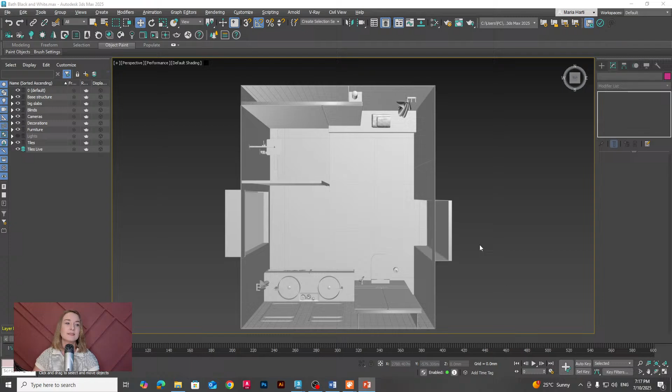We'll have a bathroom with a window, which means we'll have natural light coming from outside, and a second situation. This is actually the scene you've seen in all the videos where we invited you to this masterclass. Here you can see it just in gray color - it's just the model of it.

Each of the scenes I usually recommend organizing really clearly on layers so you can easily get access to each part of the scene you need, simplifying and adding everything you need in this scene.

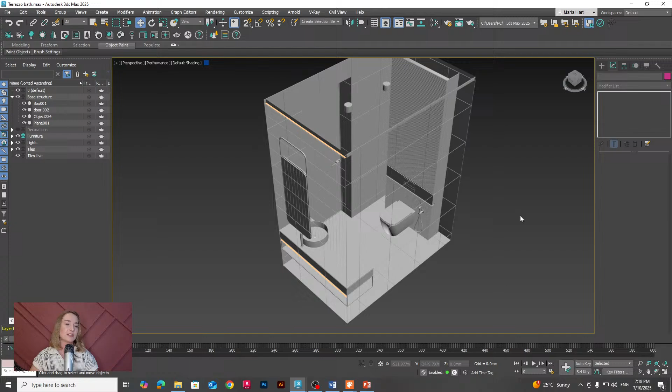The second situation is a half bath, actually a bathroom without a window, without natural lighting, where we'll pay more attention to artificial lighting. So we have here just the toilet part and the sink. You'll also notice I've used almost similar models, but in 2 different styles.

The first one with the natural lighting will be in black and white colors, the one you've seen during our invitations and at the beginning of this live. The second one will be, in contrast, a little more colorful - I'll let it be a bit of a surprise for you until the end, so you can see the result of this one too. So we have both these scenes that we'll explore for today.

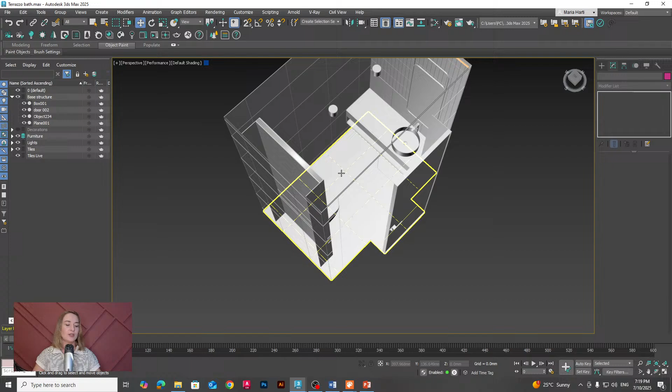And we'll start, of course, with tiling - it's the first part, this is a part of the modeling actually. Because I already have the tiles placed in here, I will just hide my layer with the tiles so that I can get back just the walls to use for this scene. And I'll do the same in the second. So that's how it looks right now.

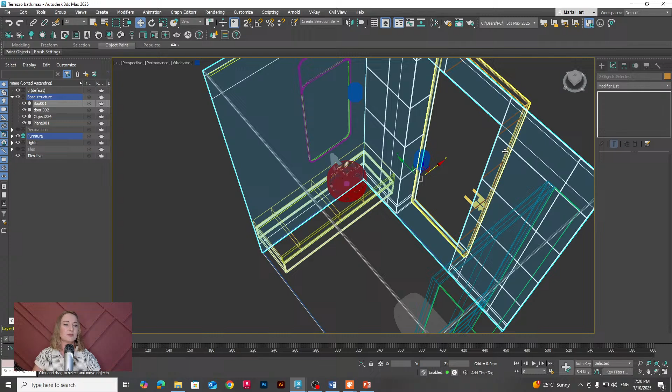Okay, and we'll start with this one. I need to move some of these tiles onto the hidden layer so I can do it from scratch, so I can show you all the process step by step.

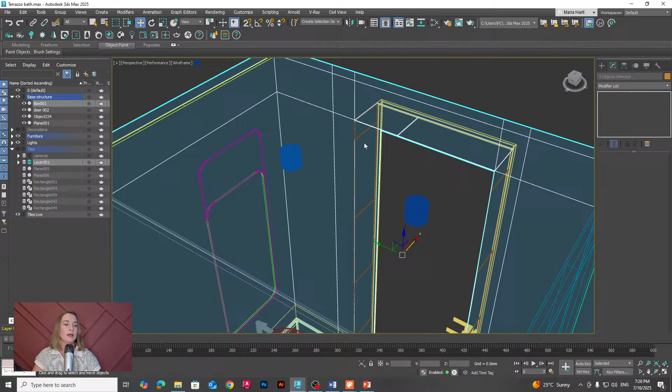I will keep just my base structure, just my walls, so that I can easily go through this scene and place the tiling that I need. Let me turn off all the others and keep just my base structure. Here it is. You'll notice I have backface culling applied, which means I can see through my walls and easily explore what I have inside this room. It's a really small room, since it's a half bathroom.

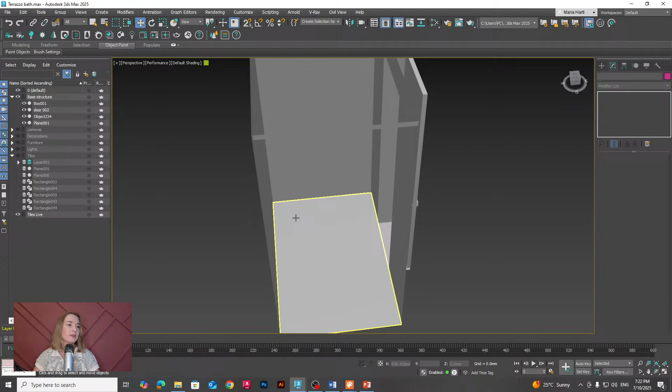What I'll use now for tiles is the plug-in floor generator. I'm pretty sure you've heard about it. If you didn't, it's important to start using it, because it's an indispensable tool that helps a lot in generating different tile patterns and will help you quickly create all the necessary tiles in your scene. But not just tiles—it can actually be used for other interesting stuff too.

The first thing I want to show you is how we can easily adjust the same type of tiles on 2 or 3 of the walls, so that they can be connected between them, always aligned with their grouts, and easily controlled in time.

I will start with a left view where I can see the door. For using floor generator I prefer using shapes—it can also be done with planes, but it's important to have just 2D objects, not 3D, because the floor generator will crash instantly. So better to go with shapes or planes.

I will start with a rectangle, using snap toggle in 2.5 to make sure that if working with line you have all planar, or if working with shapes it will be much easier. I'll go and place a rectangle. Because on this wall I will have the door opening, I will uncheck start new shape and add to the existing rectangle another one that will actually add my door opening.

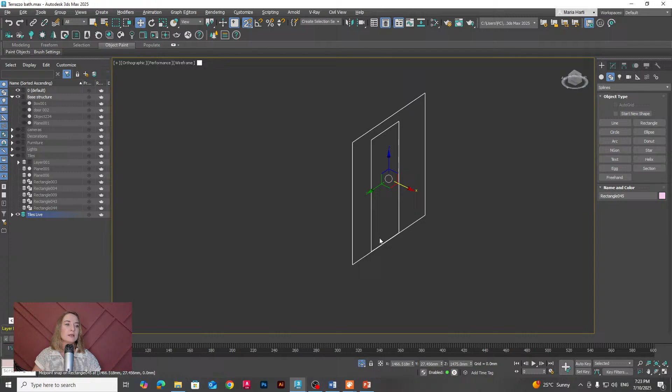Let me show you what I've got here—it's this spline. I will isolate it just to show you the next process.

Going to modify, I will move slightly outside these 2 vertices. An easy way to get just the needed outline for the wall where the tile will be placed is to use Boolean operations right inside the editable spline. Select your main spline, the outline of the wall, select Boolean, press Boolean, and click on the second shape. This way you get the second shape subtracted from the first one, giving a quick outline of the wall without the door opening. You can also go with line and outline each corner point you need, but for me this is a quicker way and you'll get a quicker result.

Let me show you what I've got now. So I have this outline of the wall, and I will apply the floor generator modifier that will help me quickly adjust and give the needed size for the tiles.

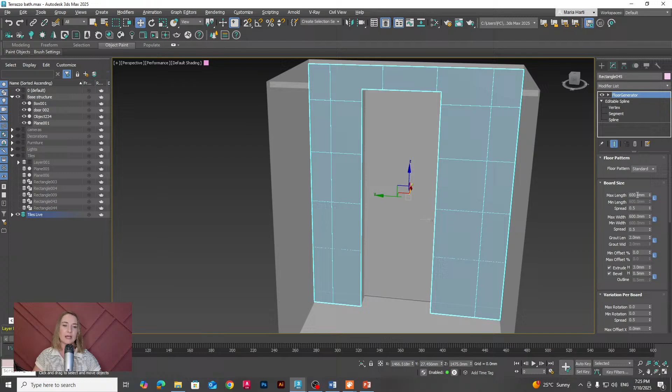In my case I have tiles 600 on 600. 3ds Max already remembered my previous settings, so it will be quicker to pass through them without taking too long. Grout length is actually the distance between tiles—if you've used it before, I'm sure you know how to set this up. Make sure you give the needed extrude amount and of course the beveling to get nice chamfered edges, so that the volume, the model, will look nicer and bring a fine touch to the model.

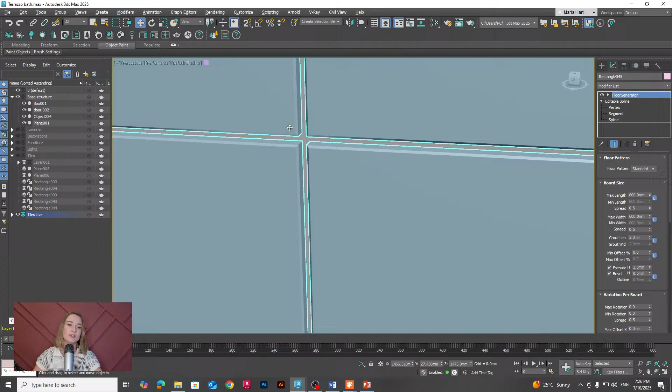I will repeat the process for the next part, the opposite wall. This time I will use not left but right view. Let me go on right, and here I will continue with another rectangle, again making sure it is placed and aligned with the wall.

Here it is. Let me show you a really quick and nice trick: you can easily select the tiles you already set up, go to modify, right click on floor generator, and copy the floor generator with all its settings already applied. Then I'll go back to my new shape.

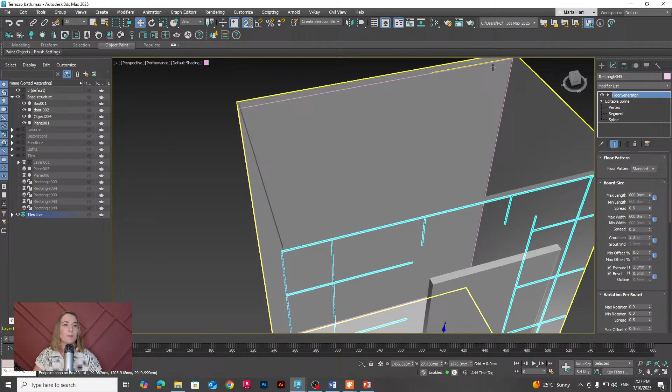Okay, let's make sure we have it in place. Now just right click on it and paste instance. Why paste instance? Because this way you'll keep the connection between the settings of this floor generator, and when you want to make some changes, for example to move or rearrange the grouts of these tiles, let me show you a quick example.

You can see that they will always be aligned perfectly, especially visible if I add the third wall. I will go with the back view.

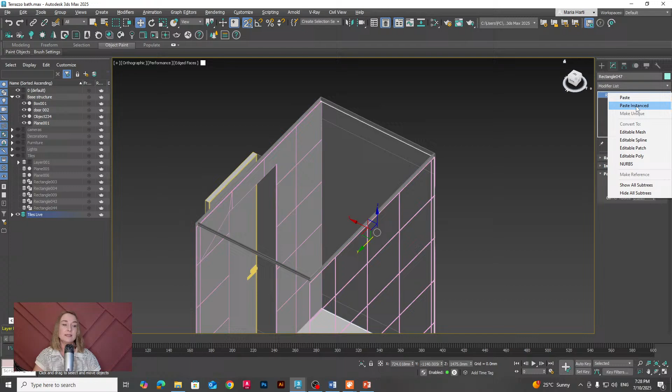In the same way I will add another rectangle which should be placed right on the wall. Right click and paste instance, the same floor generator with all its settings. Look here, you got this perfect alignment.

Again, if I try to use offset on Y or on X for rearranging the position of these tiles, you will quickly notice how easily you can control all of them at once. Just let me know if you have used this trick and if you find it useful. I'm really curious what you think about this.

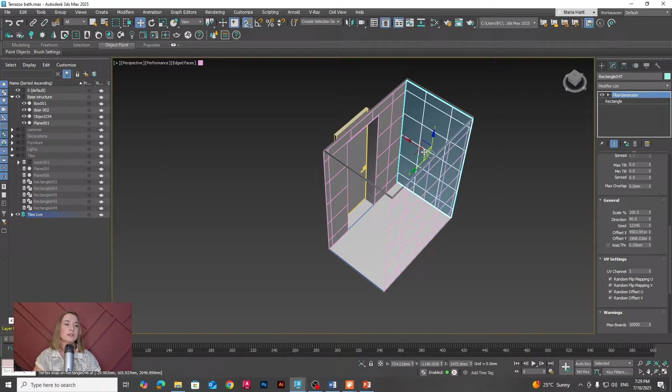Of course, when you need to disconnect any of the tiles, maybe from the wall with the floor, you can use the same trick. For example, I have this wall with floor in another material, so to disconnect this tile from the other two, I will just use the Make Unique button here.

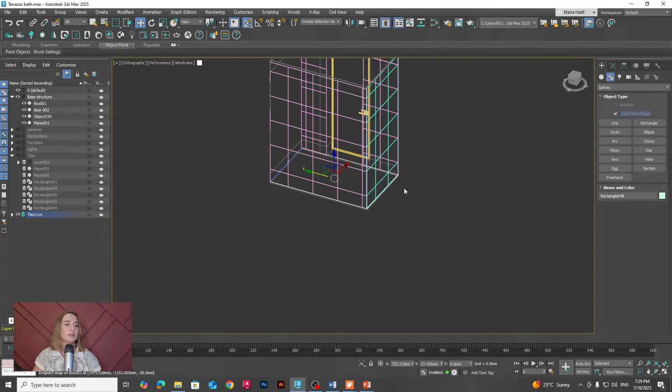Then I will copy the floor generator from this one, and I will go with another rectangle from top view to generate the tiles on the floor. Let me show you this one too.

In this case I could use the line tool instead of rectangle, because these tiles should go until the door. So let me go back quickly and readjust it.

It's absolutely important to use the 2.5 snapping tool, otherwise you can get some vertices placed at different heights, which you don't want when working with a floor generator. Make sure you have them all aligned at the same height.

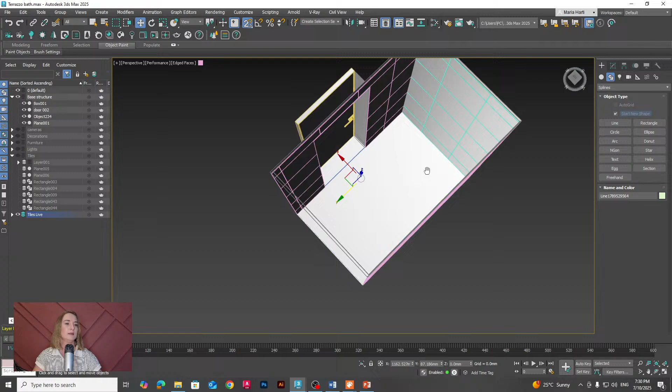So this time I will go and again right click, paste instance. You can repeat this anytime you want with all other surfaces where you use the same tiling. It'll be quick, fast, and with big impact, because you'll get them perfectly aligned in seconds, just copying and pasting the same dimensions and of course the same other settings, alignments, offsets, and so on.

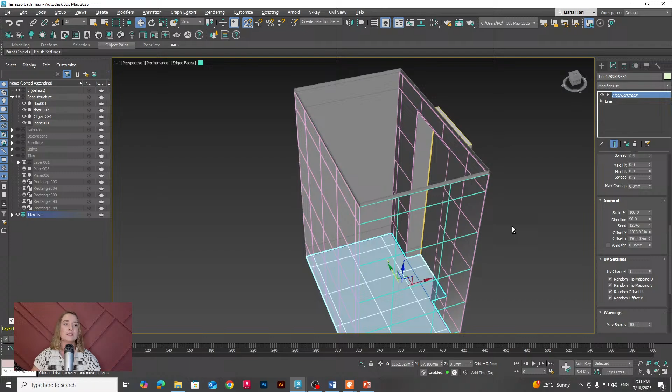You also know that you can change the direction of tiles in case you need that, and I'll show you. I'll turn back on all my other tiles that I already have prepared for this scene. You will see here the same situation.

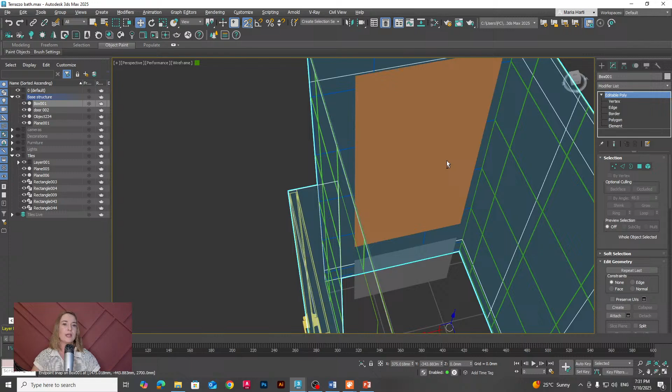Behind the mirror, where the sink is placed, I have a more detailed tile that is smaller in dimension, 250 millimeters in length and 61 in width. What we can easily control here is its direction, so we can get a horizontal layout, a vertical layout, and you can quickly create a running effect if you need that, just using the offset amount right here.

In case you need something like this - it's not in my case, but you can use it anytime in your project. So these are the most important parts I wanted to talk about in the modeling process.

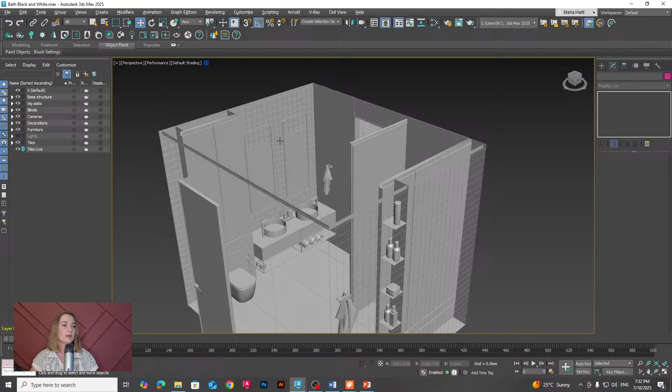It's the same for the second scene, where I can quickly show you the parameters I have. I have squared tiles here, 100 by 100 millimeters, so I have grouts - empty spaces - and in the materials step, you just apply the color of the grouts directly on the wall behind, and it will give the needed effect for the grouts between the tiles. It's simple, and you can quickly adjust it.

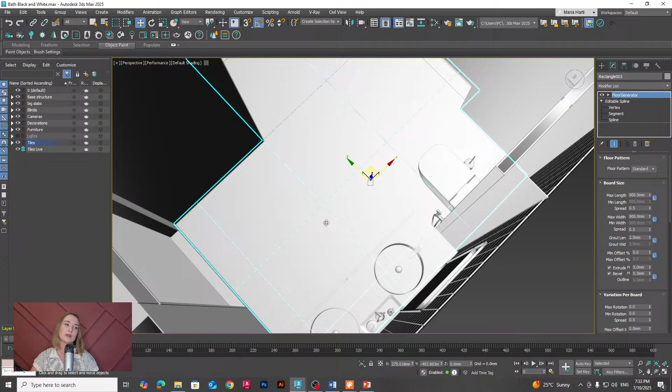Also I have some bigger tiles on the floor, 900 by 900, and really big slabs on the walls, entire height, with just a few grouts visible in a few places. Let me turn off edged faces so you can clearly see that. Okay, so that's what I have here for tiles.

Now we'll move on to setting up the light, because it's the second important part when working with visualization, actually in any situation, bathroom included.

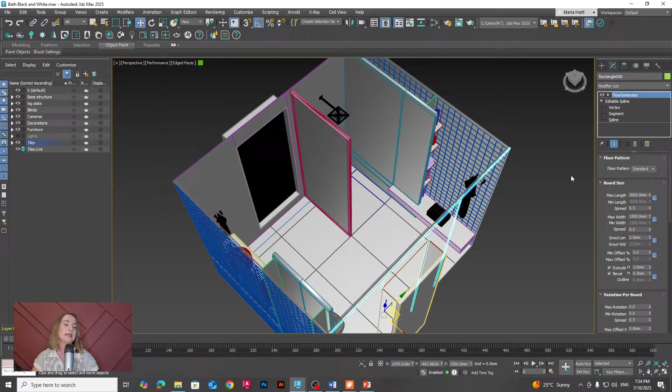In this case, we'll explore two situations. The first one is with natural light, because we have a window where we'll get environmental light from outside. The second one will be just with artificial light. We'll explore both situations because, although having a big window makes many problems easier to solve, each situation can actually be solved.

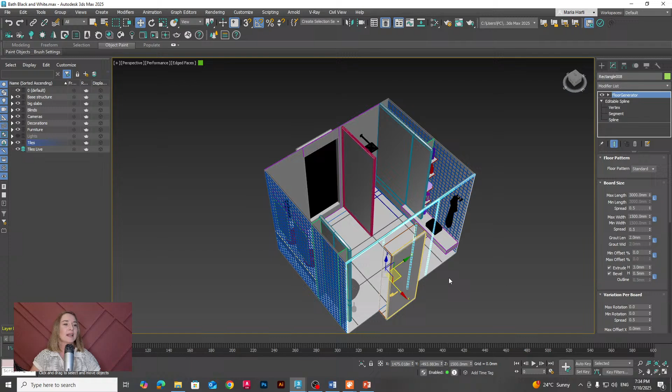Let's explore the first one, where we have natural light. For this case, I am using just a Corona Sky for environment. You can add the Corona Sun as well in specific situations if you want special effect lights, shadows from the sun and so on. It can be applied, but in my case I have just environmental light made with Corona Sky.

So for that, let me open the Material Editor. Just find Corona Sky in the maps rollout, you can find it right here.

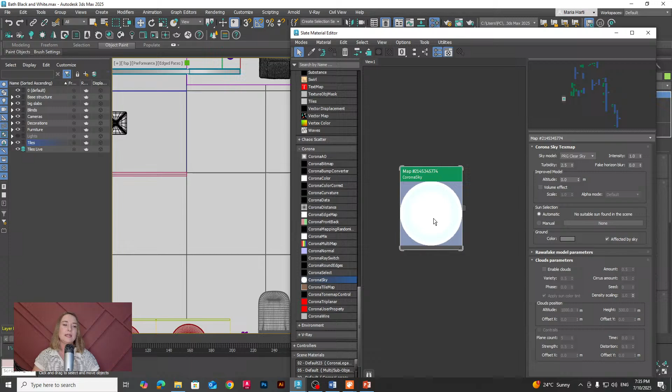Because I have a window with blinds, it won't be so important to have any specific environment view from inside. So I will limit this scene just to the skylight, but to make sure I won't get a clear line at the horizon, I prefer to blur it a little bit. I set the fake horizon blur up to 0.3.

Without sun, the sky will give a really cool, very blue light from outside. So I prefer desaturating it, using a Corona color correction and giving the maximum -1 to desaturate, to get rid of the blue color from the sky.

With this prepared Corona Sky, I will go to Render Setup, to the Scene tab, and in Environment I'll delete what I had before. I've used this before, but let me show you these steps again: just drag this node from here and place it as instance. It's important to be instance, so any changes made here will be applied here too. Go with OK.

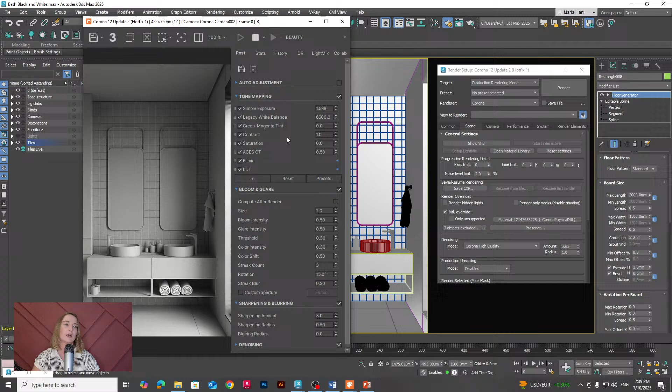You can see how the shadows and the lights play for this specific frame. Additionally, sometimes if we overexpose it or don't have enough light, we can use additional tone mapping elements to get the right effect. For example, highlight compression when you have overbright surfaces, or other things like this. I will open some of my final files at the end, so I can show you all the tone mapping elements I've used in my scene, so you can extract some information from that too, because 1.5 to 2 hours isn't enough to discuss each detail like this.

We can also go to another view, let's take a look here. You can see how the light comes in. I've excluded the glass and window glass, and the glass from the shower, from my override materials, so I can see how the light passes through and creates this natural light in my space.

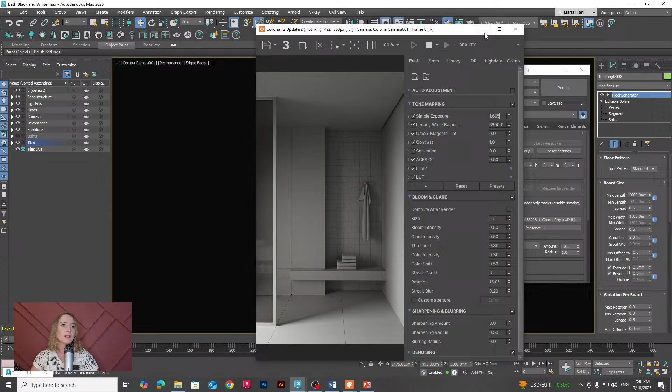Because I have prepared some artificial lights, let me show you which lights I've used here. I have two lights behind this wall with the toilet, and I have mirror lights that are actually created just with Corona lights, so we'll be able to see them later.

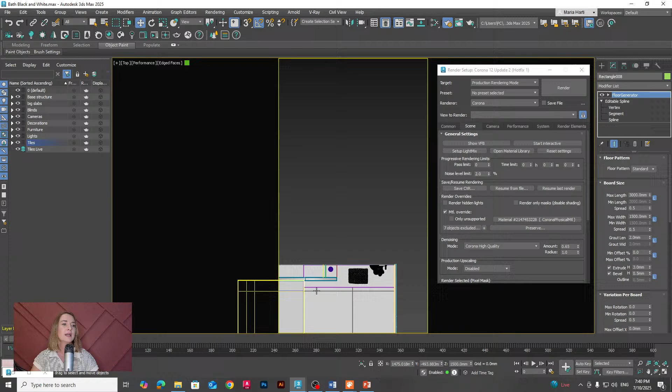And I have a decorative light here for some shelves behind the shower wall, this interesting element that will come with an interesting effect of lighting behind these shelves, and two more Corona lights in rectangle shapes in the ceiling, on this side and this side too. I've turned them on, and let me show you quickly what we can see in interactive rendering when we have these lights here.

What I have to mention here, and this is really important, is you always need to follow the right hierarchy in how you set up the lighting. If you have natural lighting, always start with natural lighting, then go with artificial main or general lighting, then go with local lighting, and at the end the decorative or more specific detailed lighting. This way you'll make sure you've set up the first one well, then the second is adjusted to the first, the third to the second, and so on. This way you'll get a balance between how each of these lights will work. If you place them all at once and try to figure out which works and which doesn't, it will be more difficult.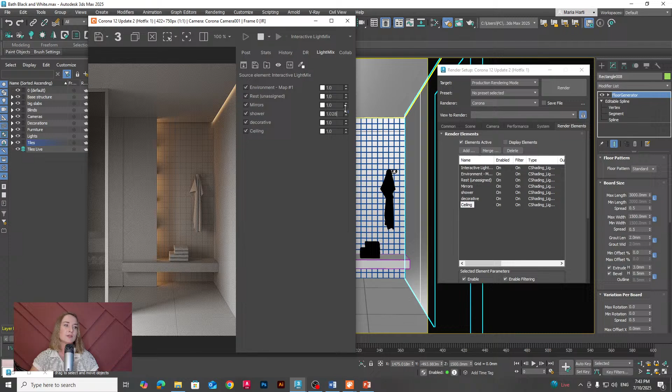I also recommend, as I've talked about in other masterclasses, Light Mix as another powerful tool that can be set up from Scene, Light Mix. It will appear here in the render elements. It can be controlled and readjusted also from here, so that in real time we can easily control and adjust each of these lights to make sure we get the needed result.

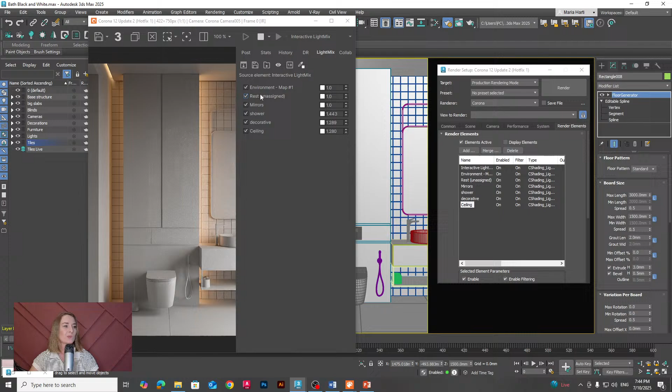In this case, you'll also notice that I've used warm color for the light, so that I want it in contrast with this cold interior where we have just black and white, to bring that touch of warmth in contrast, so that we've got this nice accent using these lights. Let me show you from another point too. Okay, that's another side. One more side here. The same warm light—you can feel the contrast. Especially when we get all the models with their reflection level and their materials, it will bring those warm touches that add a lot of realism and interesting effects for an interior. Okay, that's how it looks for this scene.

Now let's move to the second one, where we have the bathroom without a window, and let me turn on everything I have in this scene. Okay, everything I think, beside the lights. I will turn off all the decorative lighting, and let's see how we can solve the same situation but using the artificial lighting as the main lighting.

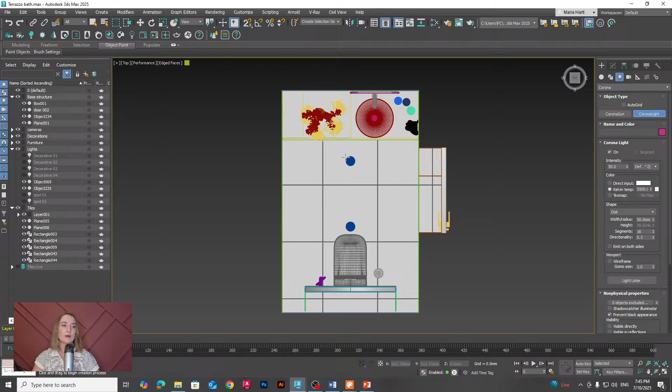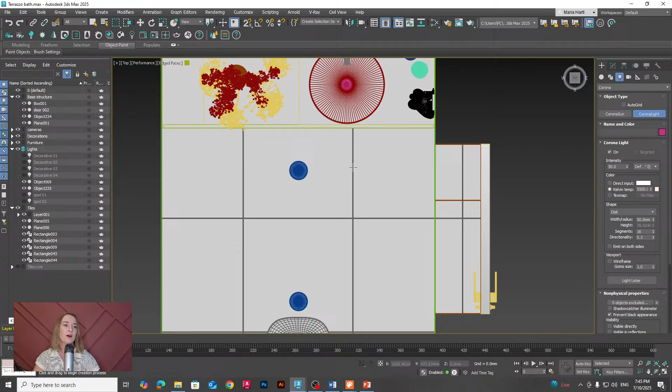I have two spots right on the ceiling, so I will fix two Corona lights. Since they are round shaped, I will use disc and just place it. I have a hidden layer, so I'll just have to activate the lighting layer so I can place them in the right place. Okay, here it is. Of course, I'll need to bring it up to my spot. It won't be directly visible, so I'll place it just next to the spot, making sure it's not inside or too high, so that the light will show up.

Next, I will create an instance copy. Always use instance copies for objects that should have the same properties—it eases up the process, so you won't need to change each of them separately each time. So let me go to one of the cameras.

Yep, here it is, and of course I will do the same thing. Let me open and make sure I have material override activated here—yes, because I want just the gray material. I recommend doing this material override because it makes it easier to understand how the light affects your interior, and how the shadows and everything works, without distracting you with different colors or materials that aren't already adjusted for your scene. So let's go with interactive rendering here as well.

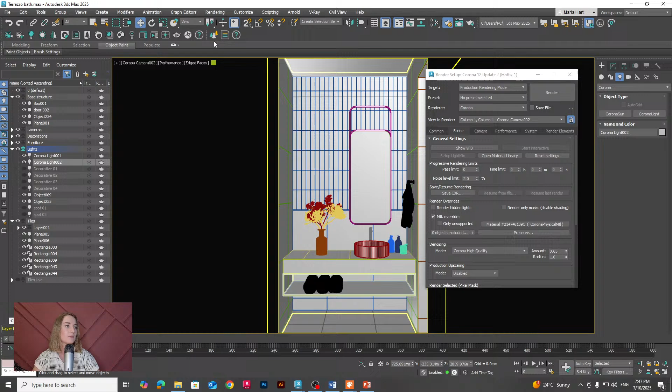Okay, I have it in here. It's not too bright. Of course, we can adjust either the intensity of this light or the overall exposure. But before doing that, I recommend instead of using just a simple corona light in this shape, even if I gave some directionality in here.

Do you know what directionality does? At 0, it lights all 180 degrees, but increasing this value, the angle of the light will narrow, so you'll get a more conic effect.

But instead of doing that, to get a more interesting light effect with more interesting shadows and reflections, I will use an IES file that I will load quickly right here, just pressing on the None button. So I have a quick set of IES that can be accessed. You'll have them in the end files of this set too, so you can experiment with them as well. So let me choose one of them.

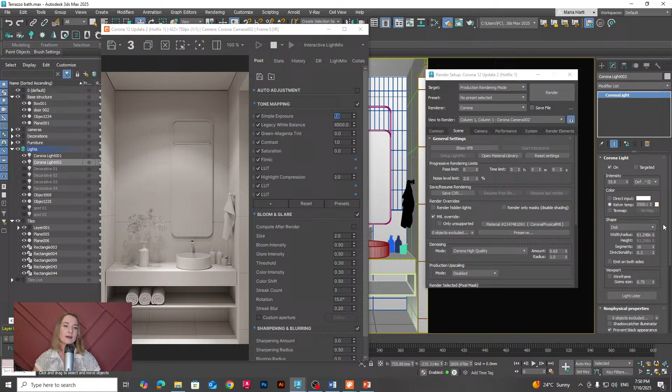Okay, so let me also show you what other lights I have in this scene. I have some additional decorative lighting, the same here for all behind the toilet, and I have a mirror. The mirror will be visible in the next step because it's using Corona Light material and it's overridden now. And I have 2 more decorative lights.

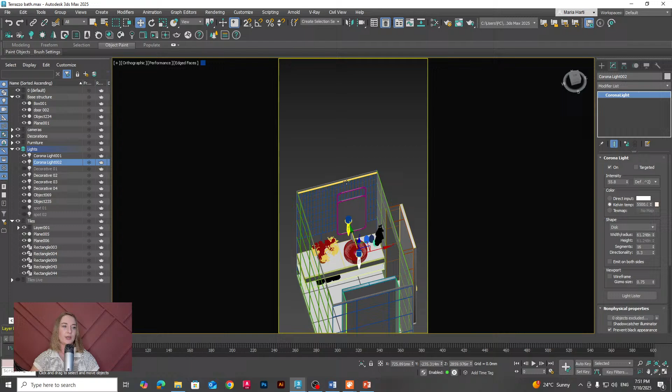Okay, let me turn them on. So these 2 are, yeah, this one up here that will lighten my tiles in here. The other one is right on the bottom of this countertop, and of course I have those 2 behind this wall.

Let me show you what we have as a result with this light turned on. Turning on the interactive lighting. I have them turned off here too, just making sure.

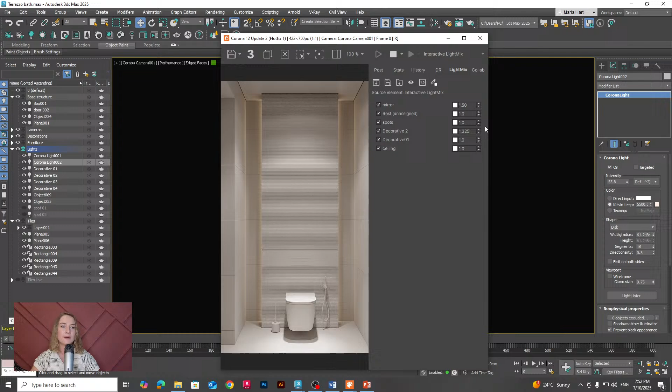Let me see which one controls which. So I prefer giving them specific names so that I can easily navigate through them and see which one gives what effect.

So here is this side of the bathroom, and we have the other one right here. So this lighting in here and this light on the ceiling that also gives some interesting effects for this tiling right here.

You can feel this game of shadows and lights, and you can feel how they work together, and that decorative light just gives an additional touch, and they are not the main light that brings light into this scene.

So spots will remain the most important parts of this scene. Let me turn them off or on, and either way we can see clearly what we have in this scene. That's one of the most important things. Okay, let's bring them back.

And now let's move to some of the materials that I want to create with you for this scene. So we'll run through a few of them. Of course, we don't have enough time to texture and create materials for the entire scene, but as I've mentioned, at the end of this masterclass, you'll get the entire scene with all the material libraries from these scenes, and with render presets all ready to be used, so you can repeat the process and learn more from this entire masterclass.

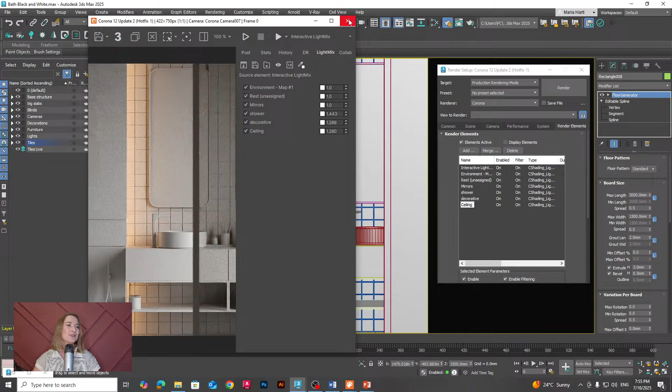Okay, until I get your responses, I will just go to the next step. So the next thing I will do will be actually the material for these tiles right here. Maybe we'll go with this one here, the squared one.

Let me just make sure I get a closer view so that we'll be able to explore more with these tiles. Maybe I'll show you a quick preview for these tiles - I'm pretty sure you've seen them. It's these shiny white tiles with really nice reflections. It will be the most simple from all others because it will be a plain color, but the roughness or the reflection is what makes it look better and so nice. So let me show you how to do that.

Because I have it overridden in materials, I will make sure I exclude this from overriding so that all the next steps will be easy to watch in interactive mode and control all the settings. Okay, let's open material editor. For this tile, I'll use Corona Legacy MTL. Let me quickly find it. By the way, you can anytime rename material for easier control and to find any of the needed materials. I will apply it right away to make sure I can run the interactive rendering and watch in real time how it will affect the tiles.

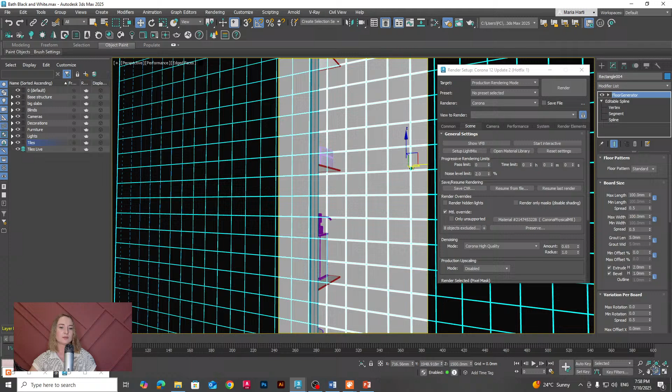Okay, so we'll need to turn on the reflection. Let me make sure I have it applied. Just a quick check. Let me open it back. One more thing here, we'll be reducing the glossiness to 0.85, something like this, so we can get instantly the preview here. And for a better shiny effect, I'll use a Fresnel IOR of 2. Increasing it will increase the amount of reflection, bringing a more glossy effect, but not perfectly reflective - it will be with slightly reduced glossiness.

Okay, let's go to preview. Let me make sure I'm inside the room because I've just used perspective view, and this can bring us to... okay, let's take a closer view. It's a bit too high, the luminosity in here. Let me show you this way. Yeah, you can see now here this effect.

Of course, the grouts will be black. Now they are with the test material, gray one. Actually, we can exclude the walls too from overriding. Let me quickly select them and do it right away.

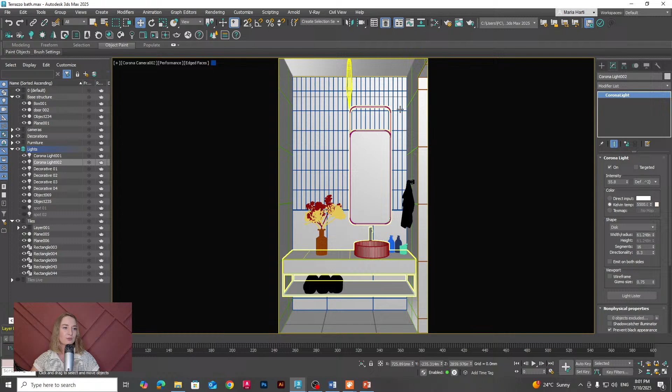Let me show you again - so just Fresnel IOR, just the color, and just the glossiness slightly reduced. So that's the most simple tile I've used in both of these scenes, but I will show you a bit more complicated version of this tile, this time in the second scene right here. Also, maybe I will go a little bit closer to this wall, because I have a similar wall here, but the shape is a little bit different for the tiles, and here will appear a nice color instead of the first one.

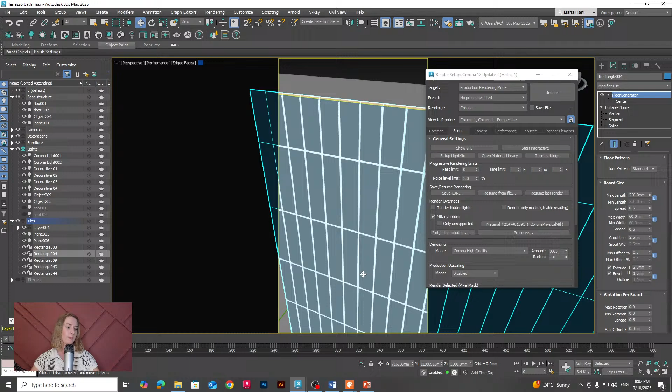Okay, let me go and exclude them from overriding material. Let me quickly check here the settings. Almost there. So going back to material editor, creating a new material for that too.

We can go actually with both Corona Physical or Corona Legacy. I like controlling the roughness, or let's say the glossiness, more in Legacy, but it's more because I'm used to it - both of them work as well. So let me go and do some changes here. Instead of using a simple plain color, in this situation I will use a variation of the same color. For that, I will use a multi-texture, which is also an external plugin that can be installed and used whenever you want. It is really nice and easy to apply.

So let me quickly find it. It's right in the general maps, multi-texture. It works well with floor generator, so if you use them always you can combine them together, but we'll explore the other situation with multi-tiles, which can also be used as an alternative for multi-texture. So what we'll do here, I will apply it over there.

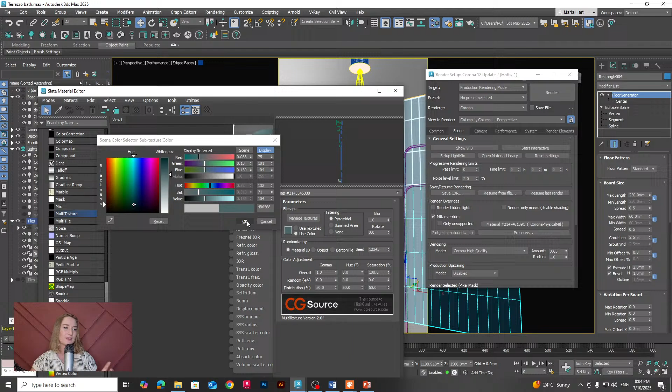But to get a more interesting effect, I will give it a random variation in the multi-texture settings. So going with 0.1 here, 0.1 here, and 0.1 here. You can see in the sample how it affects the color variation of your material.

Next, I'll go to the general settings of the base material so that I can turn on the reflection, which is important here too. I will slightly reduce the glossiness - I don't want a total glossy effect, so I'll reduce it to 0.8, and slightly diffuse the reflections, blurred, yeah.

And of course, I want one more additional effect here, and I will get it in the bump with a noise map. I will find it right here and just reduce the size to make sure I can see how this noise will affect the tile. I can turn on its visibility.

Maybe I will isolate it for a while to make sure I can see it. Let me check again if I can find it in my preview. Yes, here it is. So that's the noise.

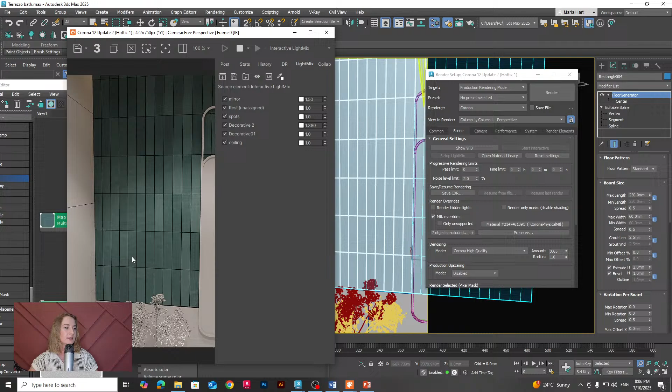You can see this slightly waved effect. I think the effect is a little too much. We can easily reduce the amount of bump by going to the maps rollout in the basic material, and the bump amount I will reduce to 0.3. It's more than twice reduced, yeah.

So we'll get that wavy effect, but it won't be too much. If you feel that this variation is too big and you want the colors closer to each other, you can easily come back and readjust the values here - lower values will give you lower variation, higher values more. Let me go with 0.2 or maybe 0.5. Okay, you get the point.

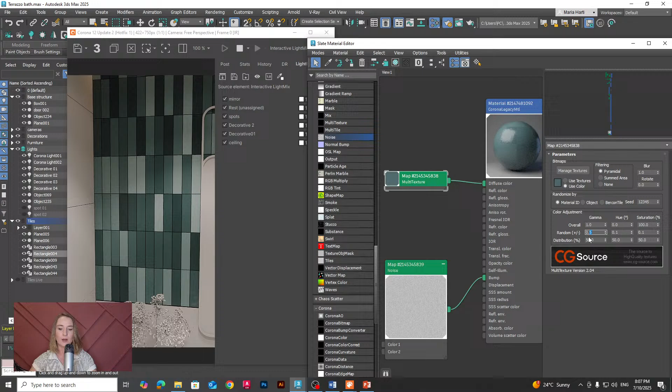Yeah, it's a really big contrast and difference here, so I'll reduce it back to 0.1. The same with hue and the same with saturation - three settings right here.

Okay, let me go back here, maybe to find a nicer view. I think I need my mirror with its light also visible as material, so that we can see more of this effect right here.

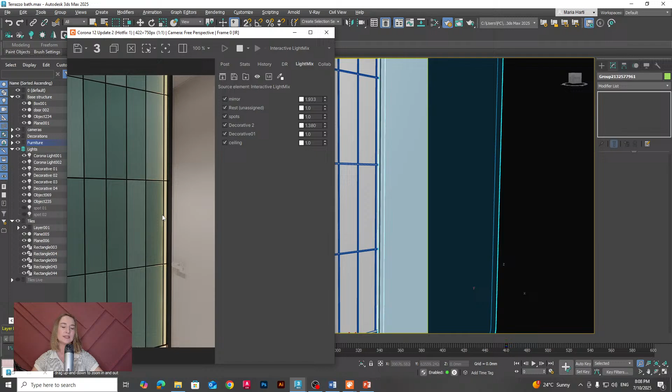Okay, so here it is - you can feel and see it right here. Of course, in preview, in interactive mode, it won't give you all the details, but I will show you at the end the final render so that you can see more exactly the final effect, the final result of this tile.

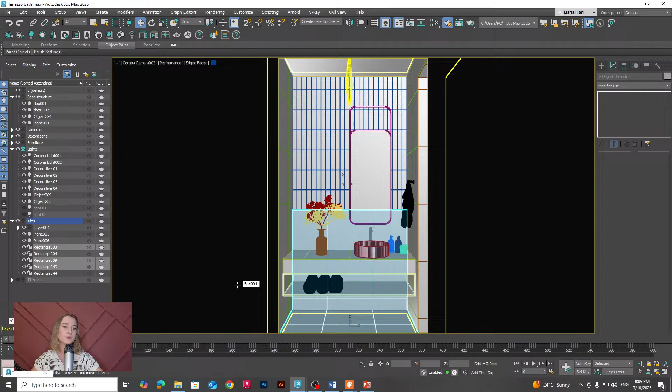Okay, and now I will go ahead with the third material, which will be a terrazzo material on this side of the wall, on the floor, and on the back side of this wall too. So I've selected all of them. Maybe I'll go to this camera view. I will show you some tips for the cameras as well, but it will be in the next step.

So let's open the material library. Let's give some place for the new material. So here we'll go with Corona, let it be Corona Legacy as well. Oh, sorry, not this one.

Yep, so here I'll use multi-texture, but this time with maps, with external images that will be applied here. Just let me find the same - it can be done with multi-texture or with Corona multi-map as well. So let's try this time Corona multi-map. Let me just quickly find it. It is right here - this one is built into Corona, so you won't have trouble finding it.

Okay, so let's go to diffuse. I will load the batch load textures so that I can easily find my textures. They are right here - this type of colorful terrazzo. Open them.

Maybe lowering a bit the blur multiplier, and of course we'll need to add reflection for this material. I will reduce the glossiness as well, around 0.8, to get a nicer effect right here.

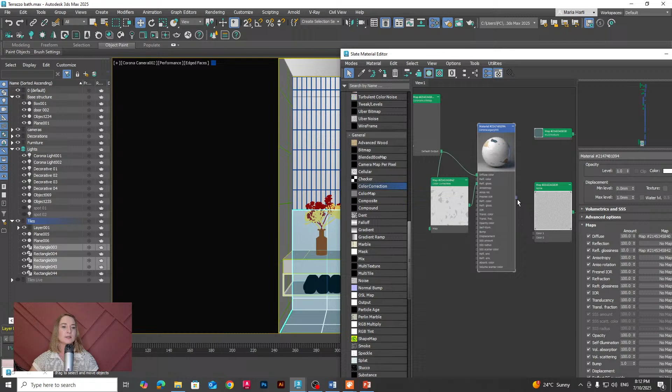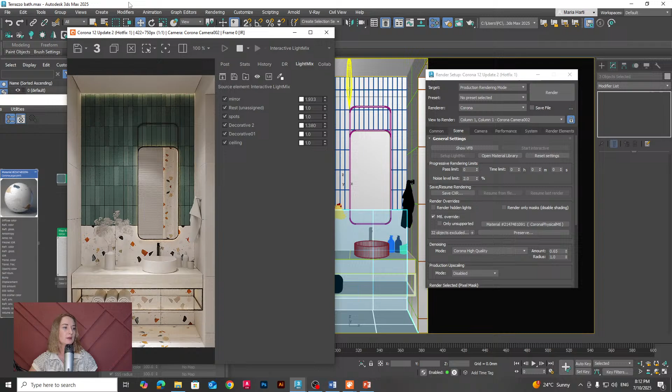Okay, so let's apply it to selection. As well, I will make sure I have them excluded from override material. Let's see a preview. Yes, that's the material I wanted to get in here.

I will show you one of the renders for this scene so you can see the difference. You can see the noise in the tiles, the color variation that can be easily controlled, and of course this terrazzo material. This render shows better each detail that can be noticed in close-up images.

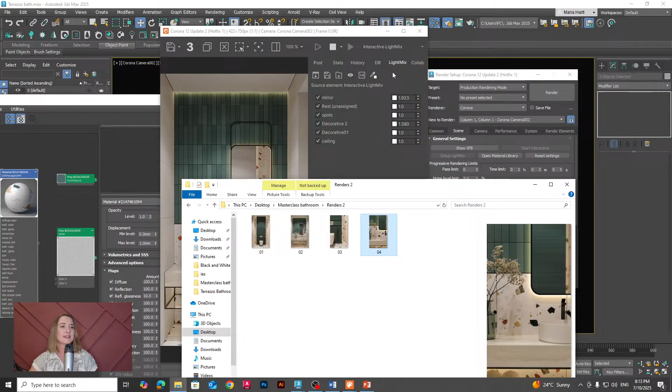I will quickly show you the fourth material, but this time I will just open the created material to show you the difference. Here is the anthracite dark gray color for the floors and for other elements in this scene.

I'll open again the example for you to know what I'm talking about. So this material is on the floor, and also what you can see on these walls right here. What I've used here again is Corona multi-map, where I've loaded all the variation tiles for this material.

For this material I have prepared other black and white textures loaded in the same way, but this time connected with reflection color, reflection glossiness, and bump to get a more complicated effect, a little bit of bump and a little bit of variation for glossiness on each texture separately.

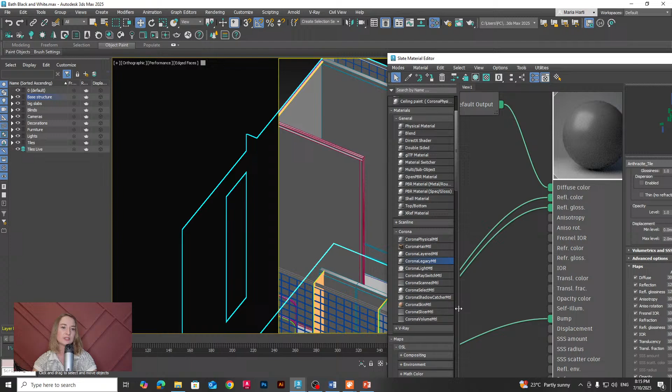This way you will get all these textures applied randomly on your floor generator, and each unique tile will look interesting and more realistic. So this way, or also you can use multi-texture, loading the same set of textures.

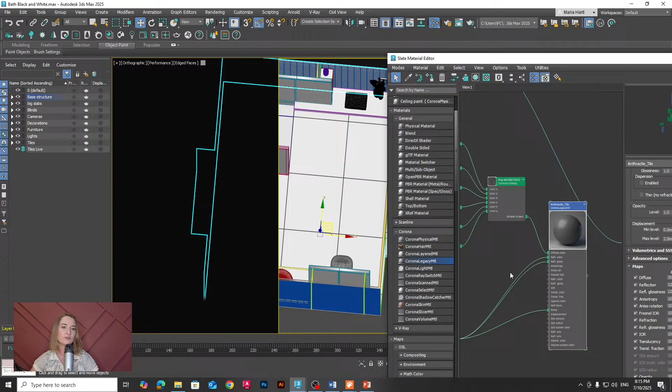Let me now go with unchecking material override so I can show you quickly how it looks. So that's the ready material with all the textures. Let me go to a preview.

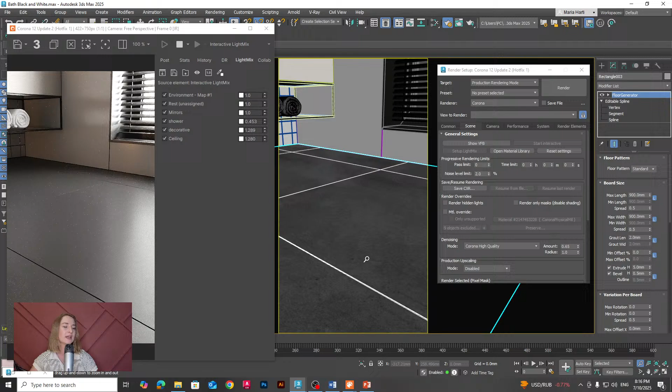I think I'll need a closer view to make sure we can see some details in here. Of course, for more details, we'll need to run some production rendering, because interactive rendering gives us a quick result but not all details can be previewed. Anytime you can control this and use different previews in different situations.

Okay, so that's with the materials, and now let's talk about cameras. I know some of you asked about framing, how to get this camera placed so that everything is clear, that nothing is distorted, that angles look good, and nothing is bothering the eye when you watch and look at these renders. So here are a few tips that I want to share with you.

For that, let me just make my cameras visible, the ones I already have. I will show you one or two how to set them up, but then I will just show you what I've used in some of the other frames I have already done for these scenes.

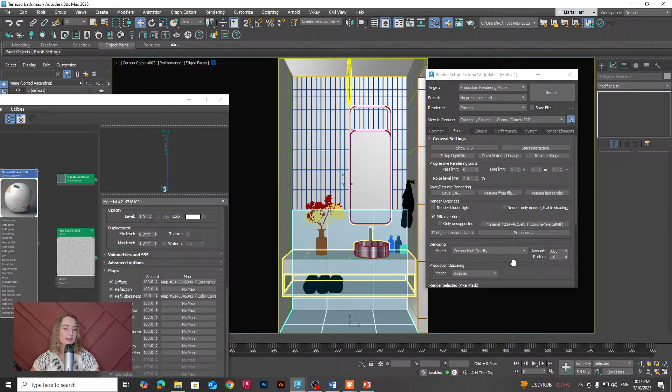Maybe I will start with this one. It's more tight, a tight space, so it's usually more problematic in this way. We want to get nice perspective, nice views without distortion.

So in this case, start with camera creation. Usually I work with Corona Cam, but physical is good as well, if you prefer that, use that. What should we do in this situation? First of all, you will need to choose if you want to place a frontal view where you watch directly to a specific wall, for example this wall, or this wall here.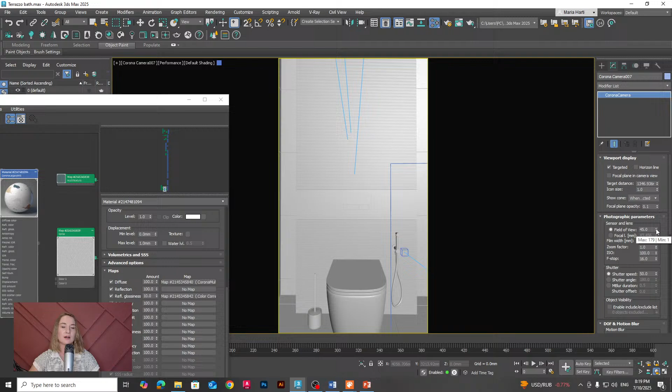When you place a camera with its default settings inside the object you want to visualize, what you'll get is this type of distortion. I can't get all the height of this room, or all the specific information I want for this place, at the same time. More than that, if we try to solve this problem just by making the camera wider, you won't solve it, you'll just increase even more the distortion of the perspective.

So don't do that. This will always give you bad results. Don't increase the field of view in small spaces. You should do the opposite: you'll need to decrease the field of view for slight and nice views.

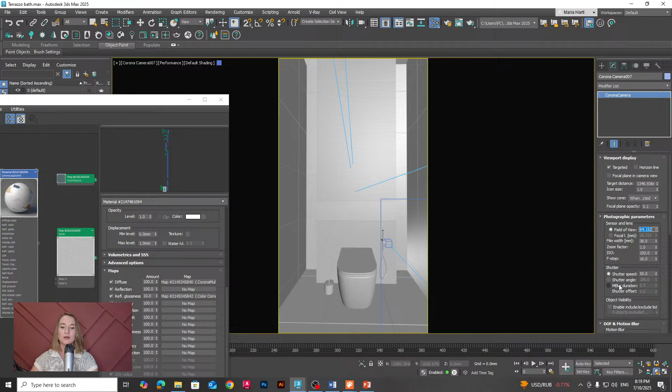But to solve the camera position that cannot fit inside the room, we'll go this way. I will bring it back for now to 45, but we'll decrease it a little bit later. So for that, I will move this camera outside the room, and this will help get more of the wall I need in my frame.

Let's go to camera settings, and here you can find the environment and clipping rollout, where you can enable camera clipping and enable showing it in the viewport so you can easily control the position of clipping. Let me quickly show how it looks. You'll get this line right here. Everything from the camera up to this line won't be visible, it will be clipped and won't appear in your view. Everything from this line on the other side will be included in your frame.

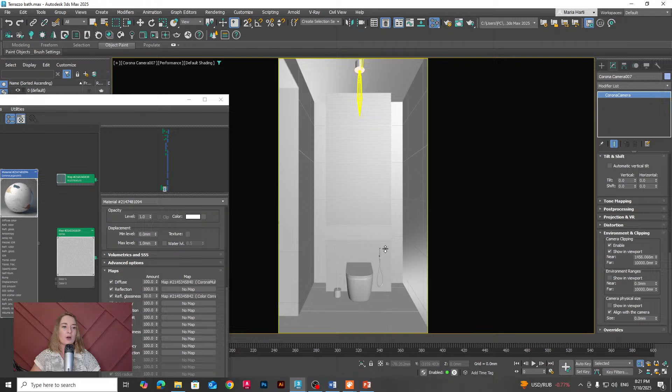Let's go inside and see how it works. I will come a little bit closer. You can see how moving the clipping right now affects my frame. I will decrease the focal point, the field of view, because I don't want it to be so distorted. I still feel it's distorted, so I'll go with something around 30 or 35. I will go even further and move the clipping plane again until I get what I need for my view.

One more important thing to consider: when you have narrow spaces like bathrooms or other tight rooms, when you set up a frame, never use horizontal frames. Squared or vertical frames will work better because the height is bigger than the width of this space. Having a vertical camera placed, a vertical frame will bring all the information you need into your frame. You can even adjust the proportions of the frame to match the proportion of the wall you want to include. That's a good tip to consider.

Next, if you want to get a perfect view looking at this wall, an easy way to align the camera perpendicular to it is to use align camera, with the camera selected. Use align camera and click on the wall right in front of you. Let me check again. This will help you make the target and the camera aligned perfectly in a line. Also, you can easily control the height of the camera using the Z value here.

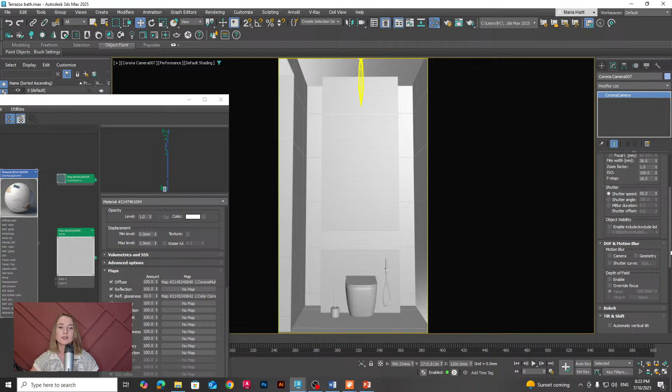I don't have the camera selected, I guess. Let me just check. Yeah. Don't use too high a position for the camera because you don't want a frame looking from the ceiling down; you want it more accurately looking in front of you. Also, when you move the target and camera to different levels, you get a slight distortion in vertical perspective. This can be easily solved with one check here, automatic vertical tilt, which will perfectly straighten your vertical lines for perspective so you get a really nice looking frame.

Let me show you how the same worked with other cameras, for example the camera I have in this direction. It's absolutely the same thing. Let me show you here: 30 is the field of view, as you can see here, make it visible, the clipping plane.

The line is right here. You can see what is included, and everything until this line is not included in the camera. Easy to control.

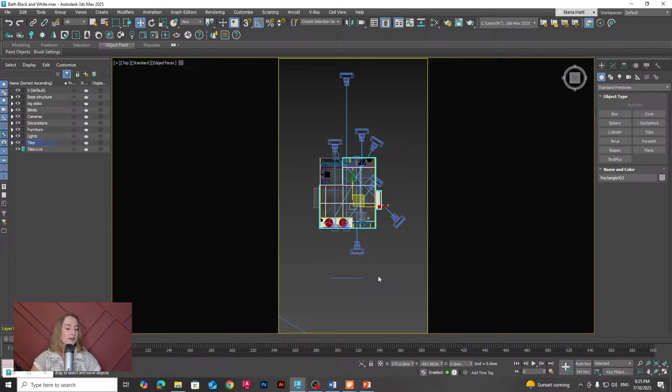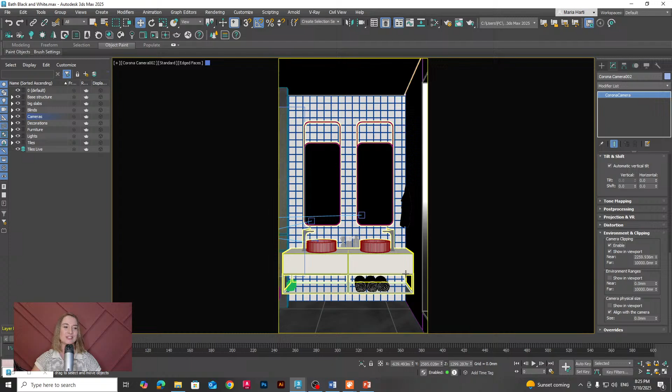I'll show you the same thing in the second scene. For example, I have here in front of the camera the glass for the shower. If I uncheck the camera clipping, I have not only the wall but also the glass for the shower in front of the camera, and I won't be able to see clearly this part of the wall. So clipping helps a lot solving this problem.

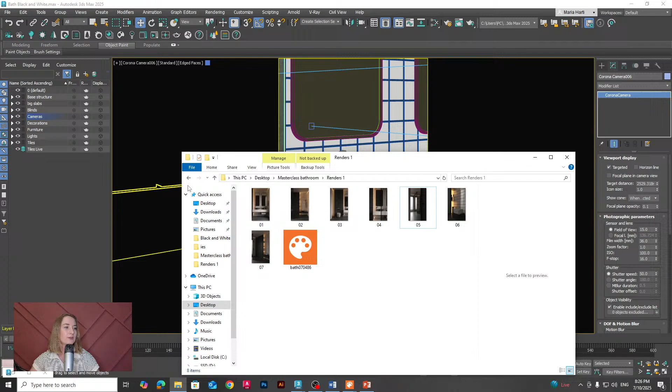And of course, don't forget about field of view, because you don't want to get a distorted perspective. Keep it lower, and even lower values for close-ups when you want detailed views like this. In my case, for this frame, I have a field of view of even 15. Pay attention, 15. Lower values decrease the perspective angles and make it nicer, closer, and less distorted. It's one of the most important aspects for camera placement and close-ups. So let me now show you how it looks in my frames.

What frames did I get with these scenes? Here are a few of the renders I have for my black and white scene, as I called it previously. This is the frame looking frontally to these two sinks. I have this nice render that looks through the door, which additionally has depth of field applied. I have this frame right here looking at this light effect from the shelves.

One more render here, and of course some special effects, some close-ups that bring details for this type of render. Maybe I can even open them here. Yep, here you go. Okay, this one as well.

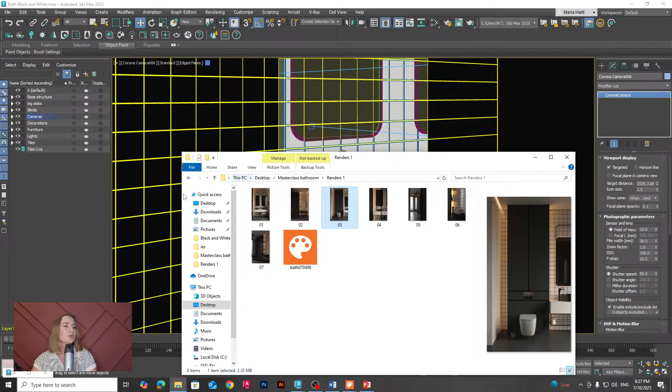I'll show you as well the second bathroom, the colored one. Here you can feel the light from the IES, which gives this nice shadow effect right here. I didn't pay too much attention, but on this wall you can see this 3D effect. It was actually made also with floor generator, giving bigger length and lower width so that you get this nice effect.

Floor generator, as I said, you can use in many other different situations. We have a video on YouTube, '3 Unusual Ways to Use Floor Generator.' If you are interested, go to our channel and check this video. I'm pretty sure it will be useful and you'll find out some unique information about this tool.

Okay, here is the close-up also, looking at this side. So here you can see the reflections, the shadows, a little bit of depth of field effect, blurred focal points, and so on. And here, as you've seen, the terrazzo and the tiling as well.

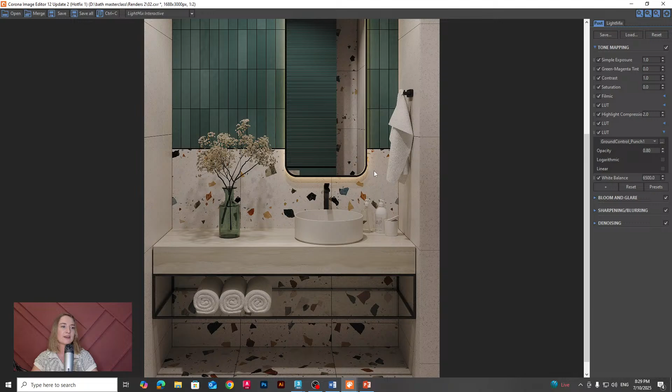As I mentioned, I've additionally opened a few of the EXR files that I usually recommend having when you have the possibility to render and save this type of format. It will help you a lot in post-production, because after you finish your render, after you close 3ds Max, you can easily open these files and easily control the post-production options here.

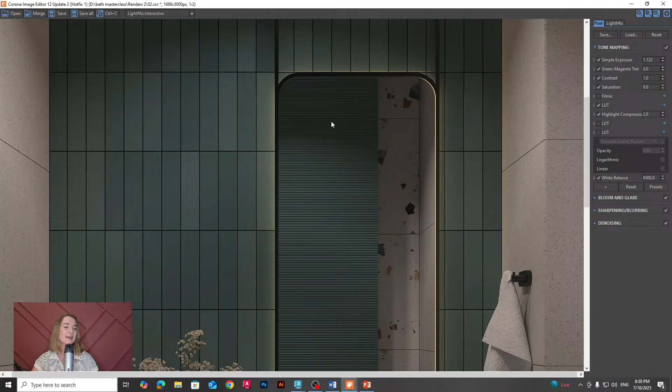For example, in this case, I can easily work with exposure, add LUTs, which are additional filters. Let me just turn them off to show you how the render would look without these post-production elements, or even turning them all off. Okay, I'll bring them back on.

So I have Filmic here. Additionally, I've combined some different filters like Ground Control Punch1. Also I have this one, Contrast Soft, and this one, Control Grunge, all of them in different amounts, not at their full effect.

I've prepared them in this way, and I can also easily turn on and off different lights from my scene: the mirror separately, the one from the back, the decorative one, and the ceiling as well. All of them can be easily adjusted for intensity and color, and I really love this tool. If you don't use it, go ahead and use it, because it saves you a lot of time. You can generate different renders with different lighting scenarios with one single render. I think it's worth it.

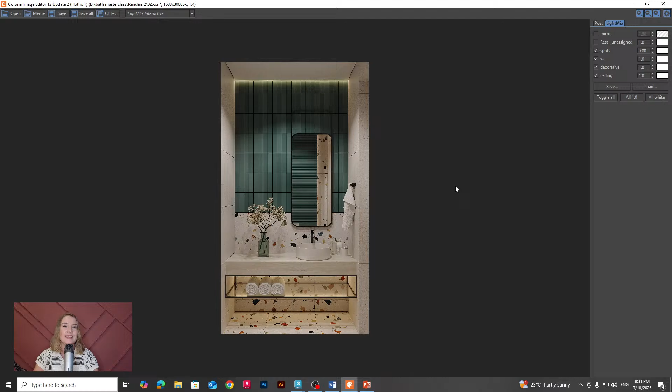Okay, so I'll turn it on, and you can see the same here, some of the tone mapping that was applied.

Feel the difference. And of course, the bloom effect. Don't overdo it. If you use bloom effect in really high values, like in this situation, you'll get results that won't look so nice. You need to give it a really subtle effect, so control it with slight values so that it won't give you too shiny results.

The main point after all this stuff I've tried to show you is that everything should be in balance. First, make sure the lighting is correctly set up and works good for your certain situation. Secondly, make sure the materials get the right amount of reflection, combine reflective and matte materials so they look interesting in contrast when combined, because you already have mirrors, glass, and other shiny surfaces.

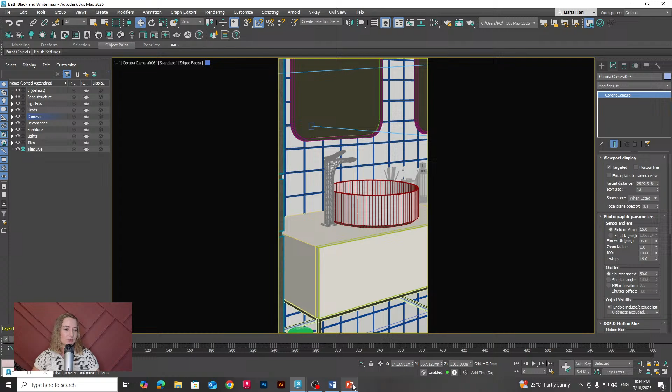And that wraps up the full step-by-step workflow for today's scene, and we covered a lot. Yes, we did. Let me just come back to my presentation because I have some more important things to give you. Okay, so all this was just the tip of the iceberg. Let me come back to the main idea.